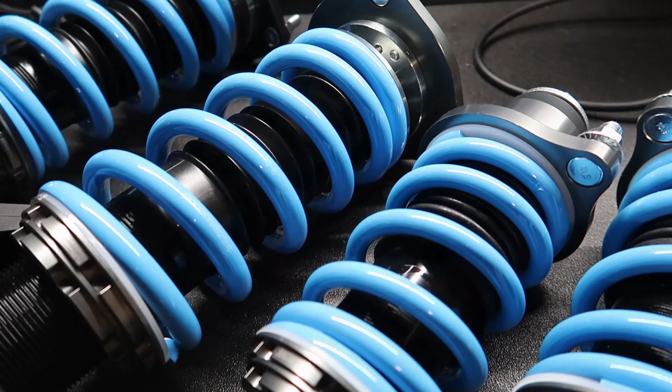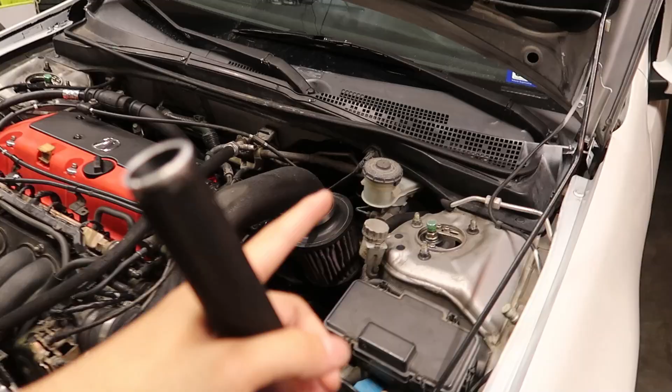Well, we got the wheels off and we're ready to install the coilovers. But I want to show you guys the Rev 9 coilovers I have installed right now. As you can see, it's leaking quite a bit of oil. The strut's blown, and the top mount makes a ton of noise. I bet it's this pivot ball in there that's gone bad. Whenever I hit a bump, it's like a really loud clunk. And now on the driver's side, when I turn the wheel, there's also another loud clunk. Not sure what that could be. Maybe it's the strut, sounds like it's coming from the bottom. So we're gonna inspect all the suspension and make sure everything's tight and see what's causing that noise.

In my opinion, I think the rear's the most annoying thing to do because you have to take out all of this interior. I remember trying to put all this back in, it was so hard because everything kept popping out and I broke a couple clips, but I fixed it. So now I'm gonna have to redo all that again. Let's go ahead and get this started.

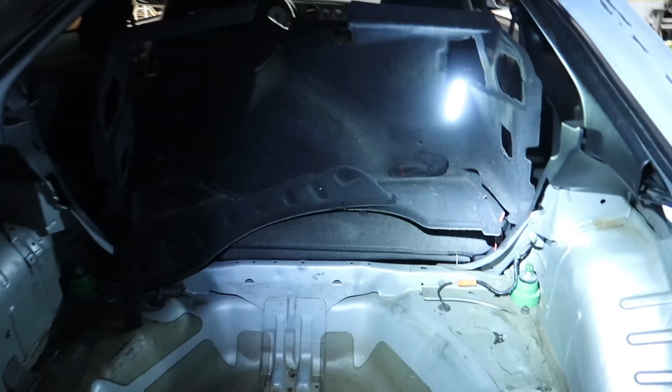Now that you got your trunk taken completely apart, you have access to the upper strut mount bolts. And here's this side, you might need a swivel to get into that. If your struts are losing tension and not staying up by itself, another thing you could do is just take some clamps and clamp it. And no matter how hard you shut it, it's not gonna close.

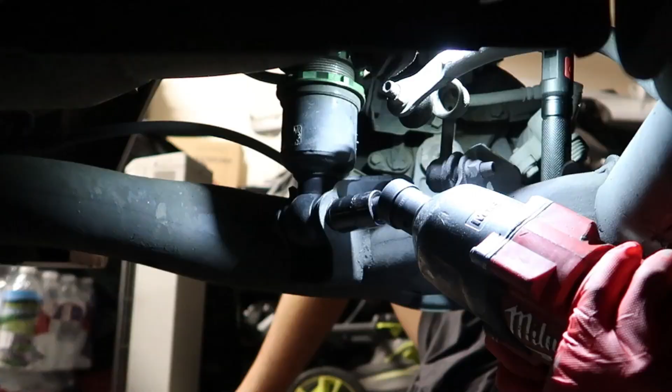Why is that on so tight? What the hell? All right, round two.

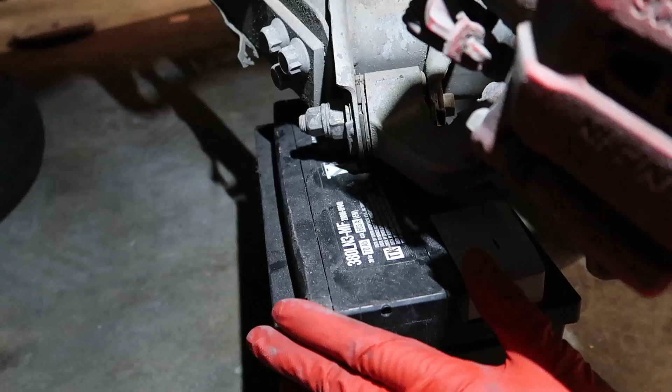It is always important to have your emergency battery to hold on to this whole assembly right here, so you're not having stress on this wire or the brake line. The way you take this out is you just do this and pull it.

Now we can take out the camber arm, but look at this, I don't think it's supposed to be moving like that.

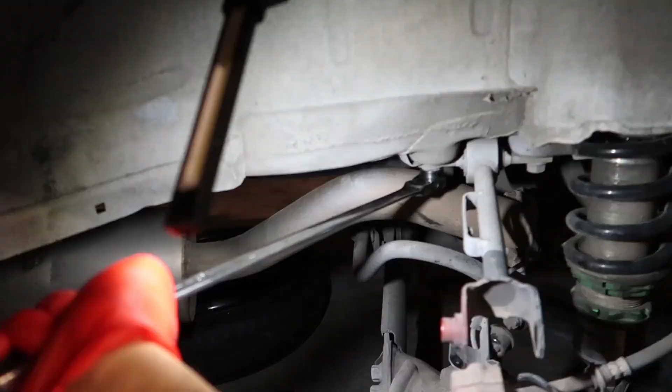Oh, I think I'm tightening that. Whoops.

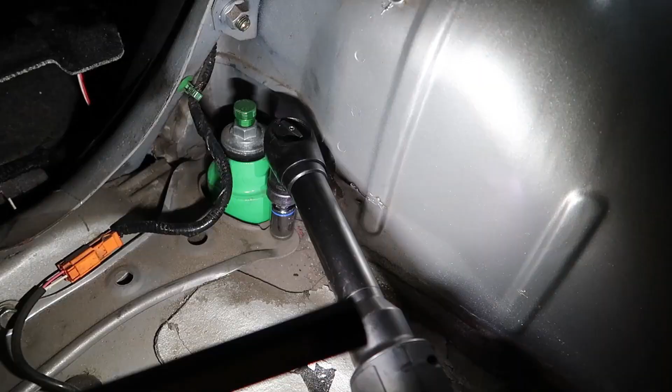You ever seen a Bluetooth sway bar link? Look at this. Bruh.

Whoa, do not do what I just did. That could have been very bad. I could have torn this line or I could have punctured this brake line. That was crazy of me.

And now we got this baby out. Let's go ahead and take off this camber arm as well.

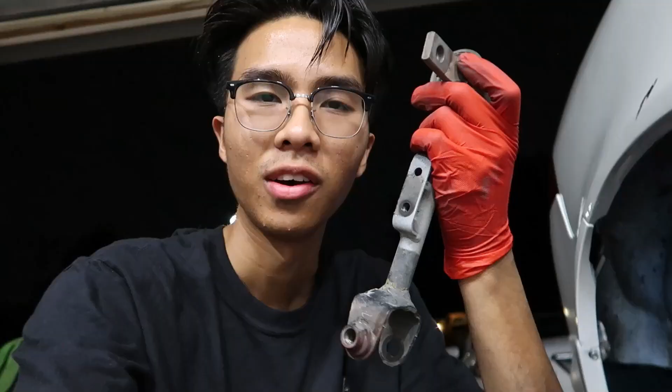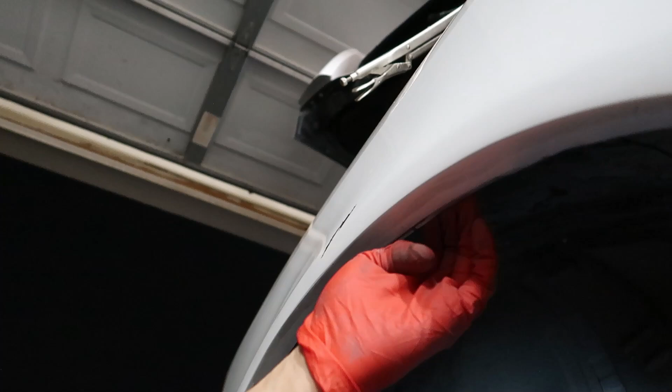Wow, I'm glad that we're replacing this. This is perfect timing, it's actually working out very well for me. I'm gonna see how to adjust the camber with this, I don't even know how to do it. We're gonna need quite a bit of camber because of this lip right here, we're gonna cut it later as well. I can feel a bunch of Bondo, so that's gonna be fun. So let's go ahead and get this on, and I'm gonna do the other side off camera.

We'll have the new Maxpeedingrods coilovers installed. Look at that, guys, barely any play in this. Oh, that seems like that's torque to spec.

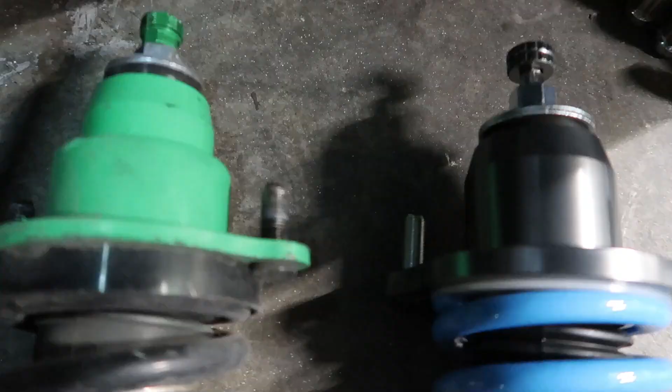So I got the coilovers side by side, and I'm trying to match the height. Do you guys see the problem here? It looks like this one can go way lower than this. I'm kind of scared because maybe when I throw this in, it's going to be hella monster truck. But we'll see whenever we get them in.

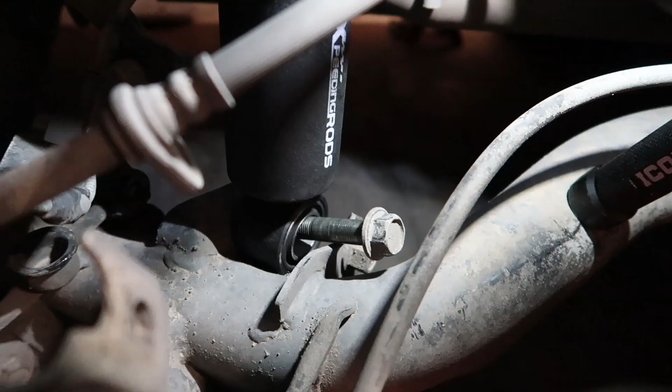You boys having a 1000 IQ moment right now. This is how I'm holding up the strut, and now I can put my bolts in. This does come with new hardware, by the way, it's pretty nice.

This shit hurts my soul, y'all.

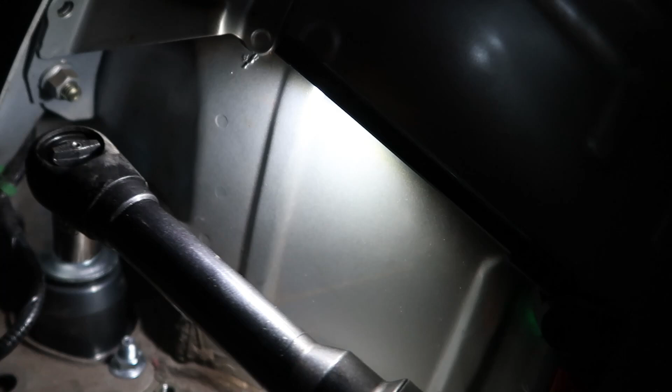The one thing I love about this electric ratchet is that it's an impact wrench as well. This thing tightens really hard. I think that's the best that we're gonna get it.

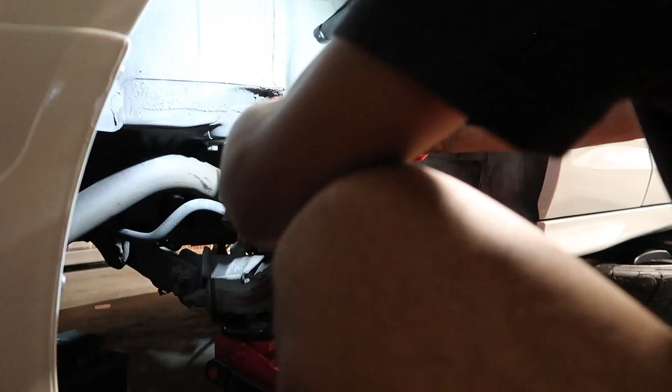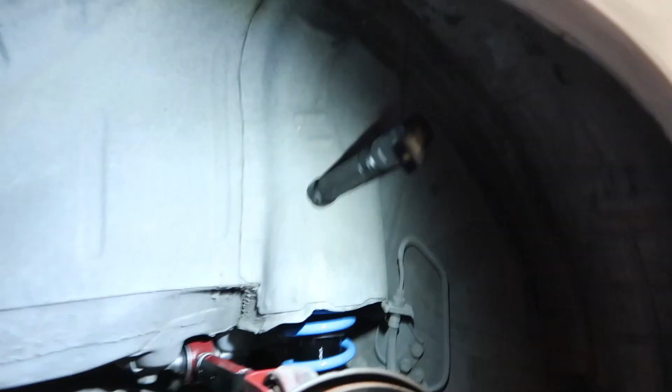So now we grab my lucky bolt, let's just force it in there. And there you have it, guys, we have the new rear camber arm installed and then our coilover.

Now let's see how high or low this thing sits. But before we do any of that, of course, we gotta swap over this side. So I'll see you guys in a little bit. That is one side down. Now we can go ahead and do the fronts and lower the car down. We'll probably lower it tomorrow though.

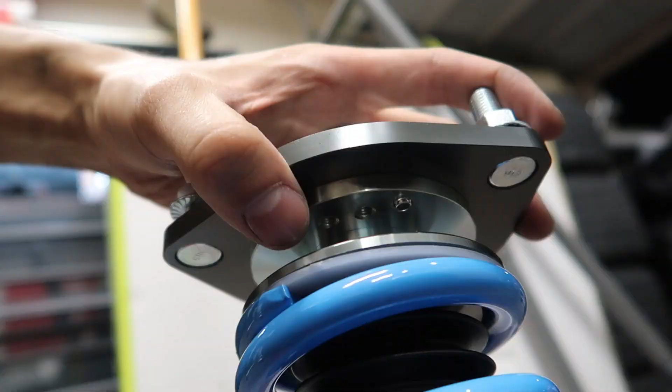One major flaw that I see with this coilover is that it does not have the adjustable camber plates. If you look underneath here, there's two drilled holes right here, and I think those two drilled holes are pretty much what these bolts would go into. It does look like we're able to take this off and put an adjustable camber plate on top, which is really cool. You know, guys, sometimes your boy just be buying random stuff, but luckily I had this on deck because it's the exact hex size for this, and we can take it off with the ratchet and not strip this out.

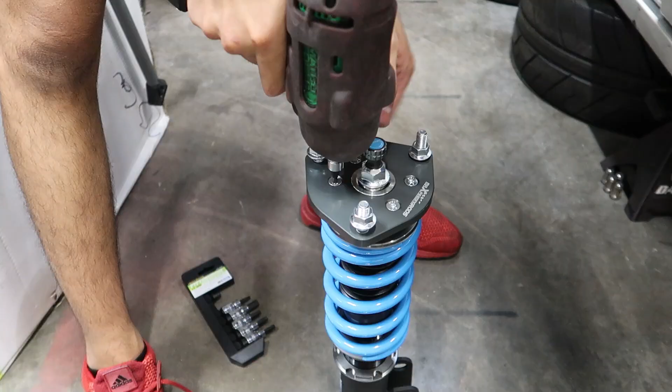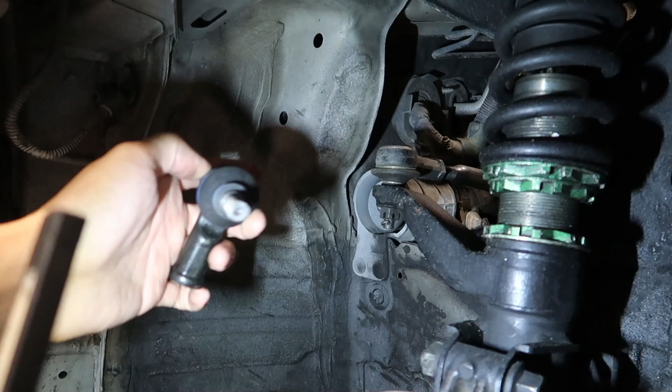I wish I would have recorded this, but I do have K-Tune inner tie rod ends that I bought for 100 bucks, shouts to my boy Derek for that deal. For the outer tie rod end, these are actually EP3, and this cost like 100 bucks too. It was expensive, but I have one RSX here, and the reason I'm running EP3 outer tie rod ends is because this coilover is actually for EP3. I thought it was for a RSX, but no, I got the right one.

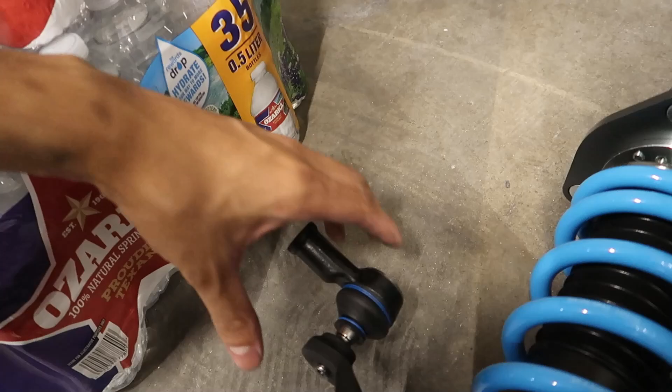This was what I got originally when I was fixing the car up, but this one fits in there perfectly, as you can see. I think it does. Shit, I might have to run the EP3 ones on this too. I'll keep you guys updated on that. This is kind of weird how it's not fitting on there correctly.

Let's go ahead and get started on installing the front coilovers.

And then you're gonna get a sensor in the back too, your speed sensor. Oh shit, I never got a 10mm there. That's crazy, you know, that's probably why my ABS light came on. Wow, okay, well I forgot to put the 10mm on there.

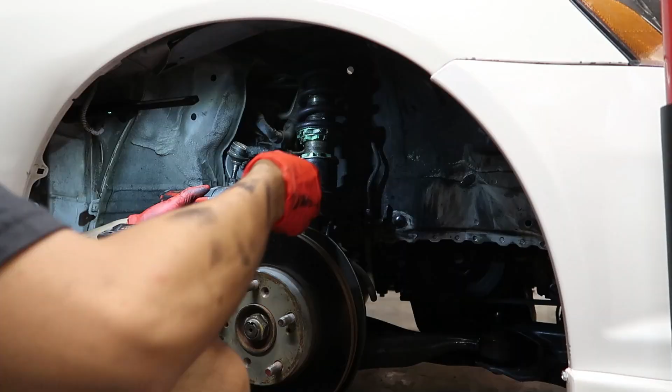It's gonna be a 17mm. Tap like that. Just needs a little persuasion. Now your tie rod is off. There we go, got the wobble on there. Should be easy just like that, guys.

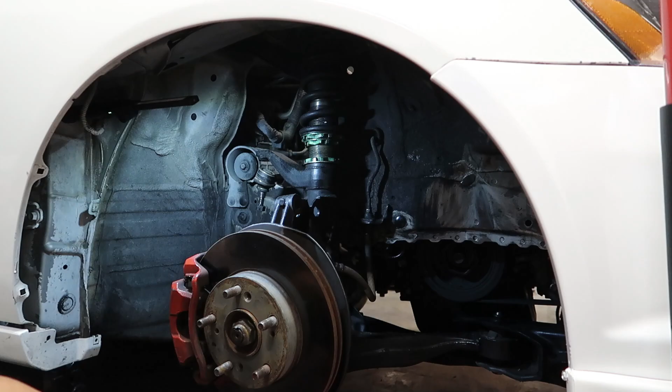Now we're gonna go on top and disconnect the strut. Some solid advice for you guys, before you take anything off, just keep a jack underneath. This thing's gonna fall forward, but as long as you got the jack, you'll be fine. This axle tends to pop out a lot, and it's pretty hard to get back in.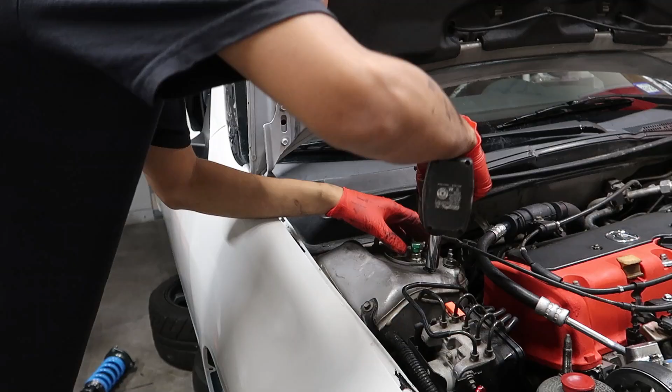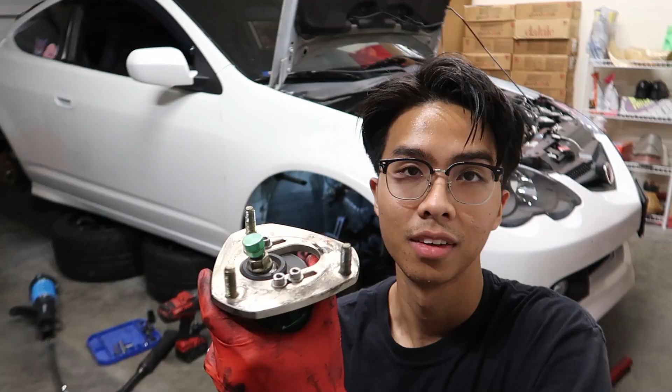All right, check this out. Do you see how this thing moves? It's not too bad, I've seen worse where you'll flop it and it'll shake, but this has quite a bit of movement to it.

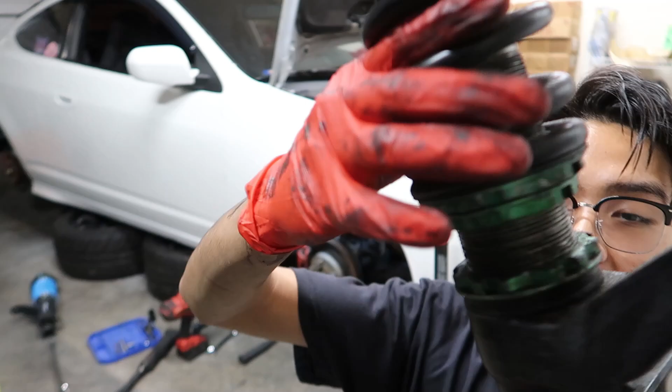And this strut was definitely leaking, you can see all the hydraulic fluid all over it, and look at my gloves. I'm gonna keep these just in case I want to throw them back on, but I don't think I'll be using these. I mean, they're blown and it's time for a new one.

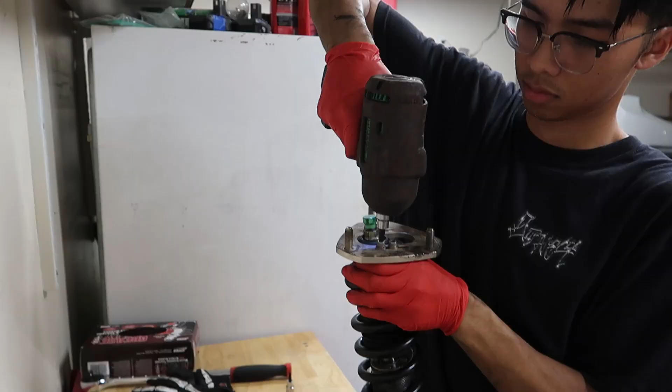Let's go ahead and transfer over this top hat. Getting this top hat off. That thing is cooked, y'all.

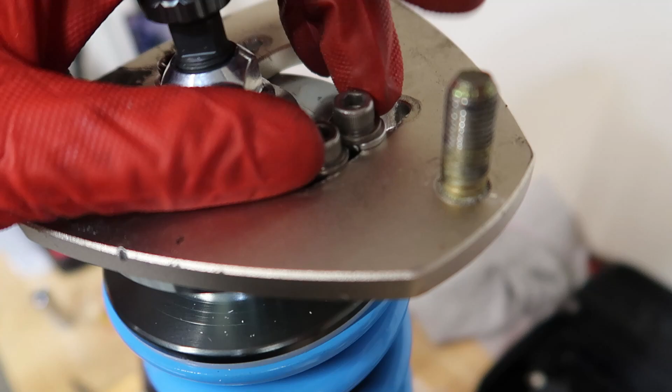Well guys, I did get the top hat on, but I did something very ghetto. I just shaved down these sides so it can fit. Obviously this top mount isn't made for this, so I'm gonna check their website and see if they do have a top mount and get that coming. It does suck that I had to do this, but we're just gonna throw it on for shits and giggles.

As y'all can see, it's the next day, nice and sunny out. Yesterday it was about 1 o'clock whenever I ended the video off, and I was so tired. I've been working all day since 7. I just ate, got some energy, did what I need to do today, and we're ready to work on this again.

Obviously this will not be enough for my wheels to fit. We're gonna need some more camber, so I picked up some camber bolts. It's my first time hearing about this, I've seen it on some cars, but I thought it was just OEM.

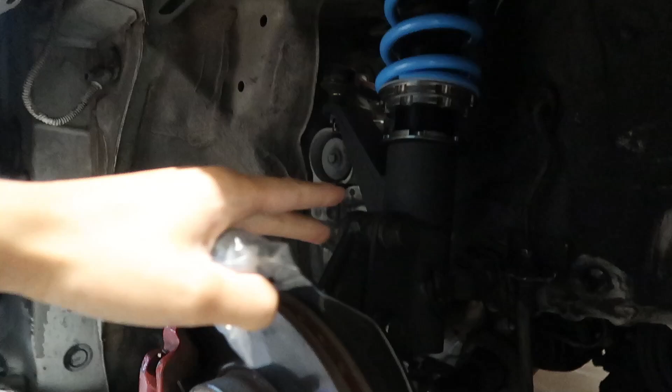So basically what you're gonna do is take this bolt and replace it with the top one right here, and it'll allow you to move the spindle back or forward. Apparently you can get up to 1.75 degrees of camber, and you're gonna need this tool right here.

I have one on the way right now. I want to make sure that the camber in the front and the rear is set, so I don't have to mess with that on the alignment machine, I just want to adjust the toe.

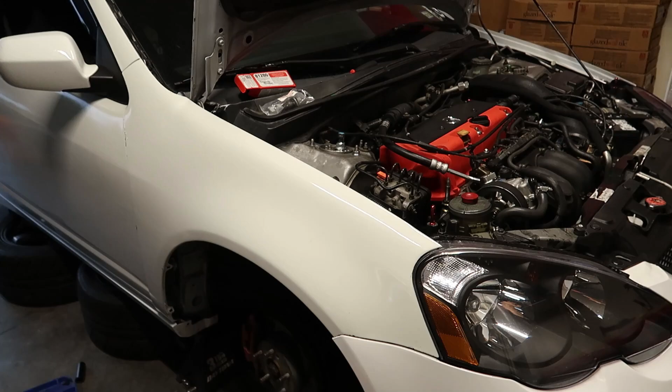But yeah, let's go ahead and get started on the other strut. This thing literally took like 3 minutes to take out, it's so simple to work on.

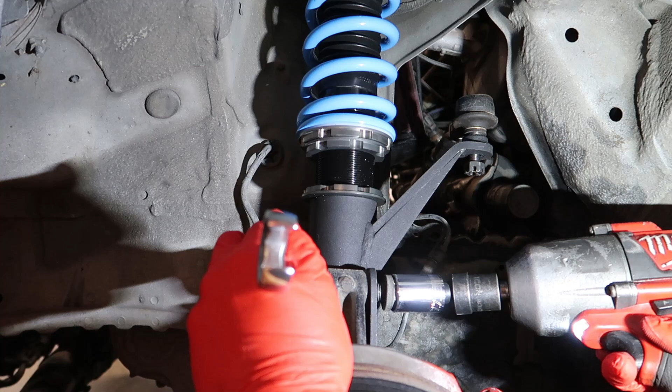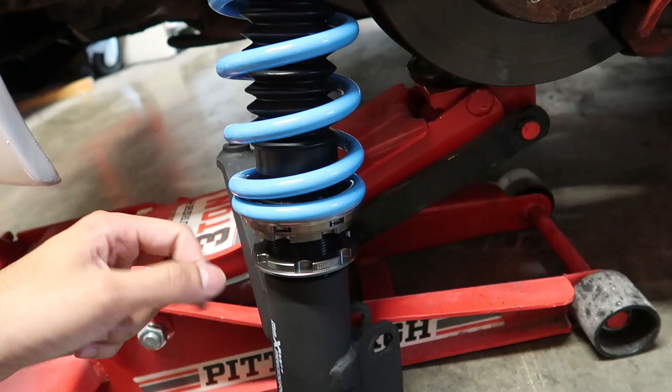Well guys, I got some unfortunate news. While I was trying to lower down this coilover, this freaking top piece just popped out. I think the preload was getting too tight. The thing that sucks about these coilovers is that the preload was already loose, so possibly this was my fault. I was just spinning it from here, and then it got so tight and everything just popped out. Heard a loud bang, but luckily this thing is fine, this pivot ball.

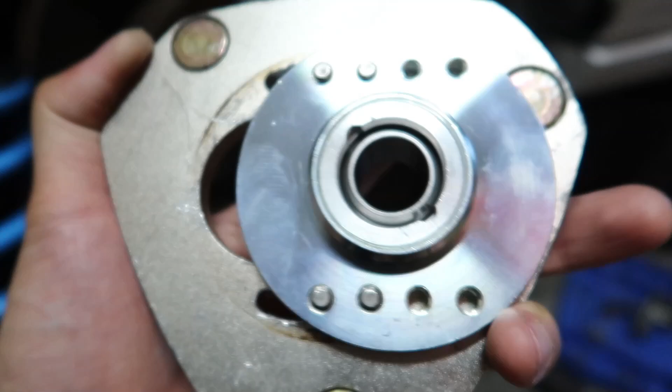So I'm gonna see how this works. I think it's just a nut, so we can just put this on the Rev 9 coilovers and upgrade the pivot ball on that.

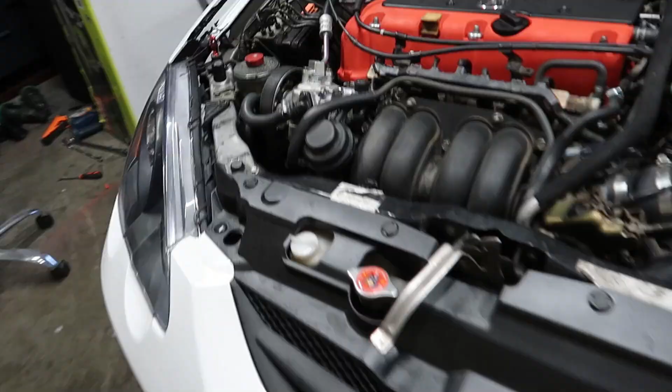We're just gonna run the Rev 9 in the front and then go Maxpeedingrods all around. Hopefully I don't die. But yeah guys, sometimes you just gotta do and not think. And I wanna get this car on the ground to see how it looks. Your boy's gonna lock in and see if I can fix this real quick. I'll get to you guys when the car is on the ground.

So I got the old coilover back in, as well as the camber bolts. Later on, I'm gonna show you guys how I installed it, but let's go ahead and see how the car looks.

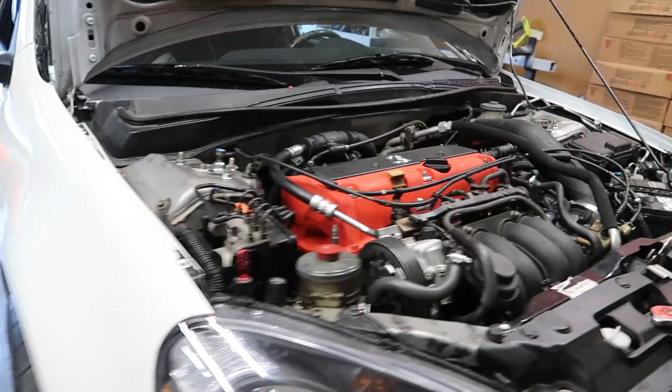For some reason, I hear a popping noise on this strut. I wonder what that is. You hear that? That doesn't even sound right.

Just the final fitment for the front. Wow, surprisingly guys, I thought the rear was gonna be very high, but this isn't that bad. I think I'll keep it like this for a bit. This one's still pretty high up. That's weird, like this one's high, and you come here, and it's like lower.

This wheel, I could tell the toe is way off. Like look at this, it's turned this way. So I'm gonna have a lot of fun driving this to the shop.

The back fits really nice. I'm actually gonna keep it like this. I was thinking about throwing on my old coilovers because I did want it a little bit lower, but for now this will do. I won't have to cut anything. And it doesn't look bad for what it is. I don't want this car to be too low.

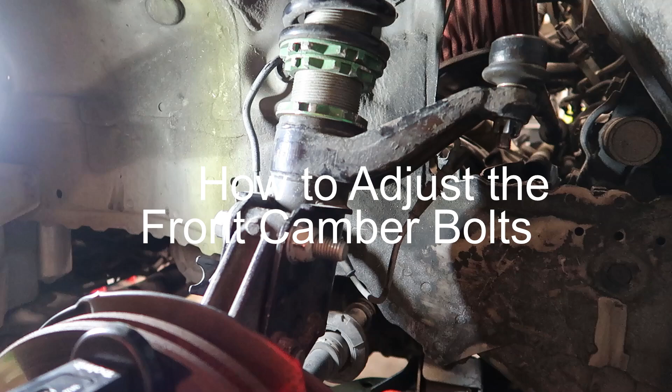So what you're gonna need is a 22 for this side and a 19. And it says not to over torque this. Unfortunately, I didn't bring my torque stick with me. I'm gonna have to guesstimate this. And what I've seen is that if I spin this, the spindle will go in or outwards. So we're gonna see if we can get this thing to...

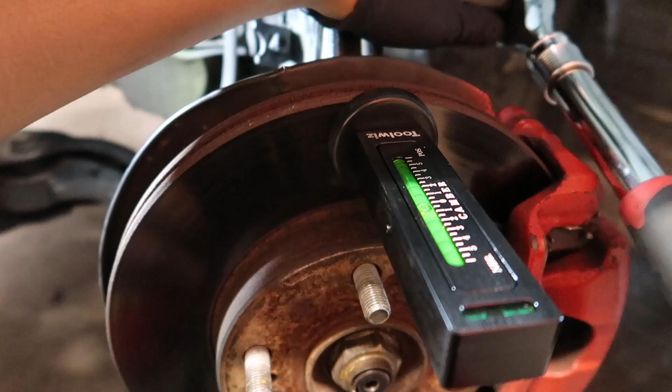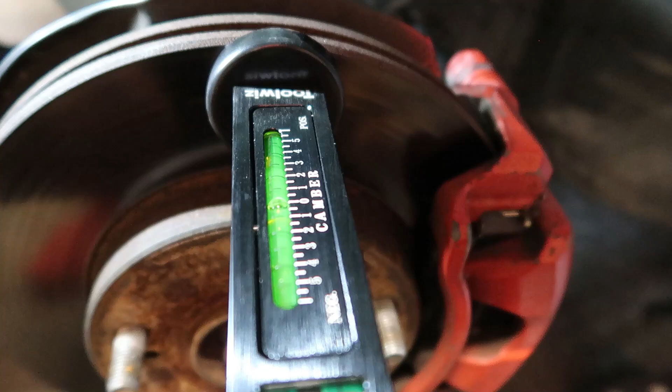2.5-ish. So I'm gonna loosen it just a little bit like that. So you see it's going upwards to positive. I need to go the other way to make it negative. Huh, so it seems like it can only go to 0.5.

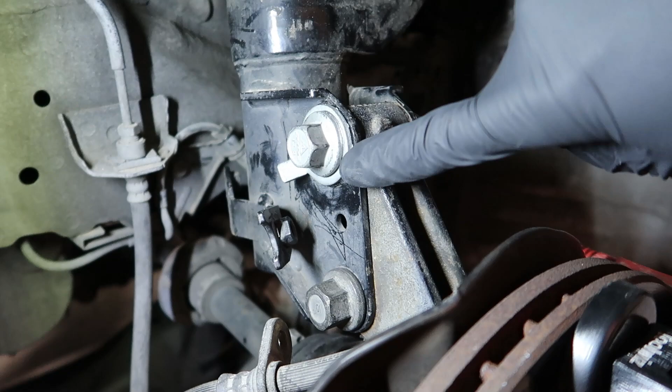But you guys kind of get the gist of it. You're just gonna have to keep adjusting this. I might take the bolt out and reposition wherever this tab goes. There's a tab right here. So maybe I'm gonna move it to the front and see if that will work. It's just gonna be a bunch of trial and error, and I'll show you guys where I'm at in a bit.

After 20 minutes of messing around, I finally got the -2 mark, which is how much we have on the other side. And basically all I did was add this washer right here that came with the kit. So now I'm gonna tighten this down. And it looks like I can go even more if I wanted to, but I want to keep it at around -2-ish. I heard it's pretty good to have a lot of camber on these cars.

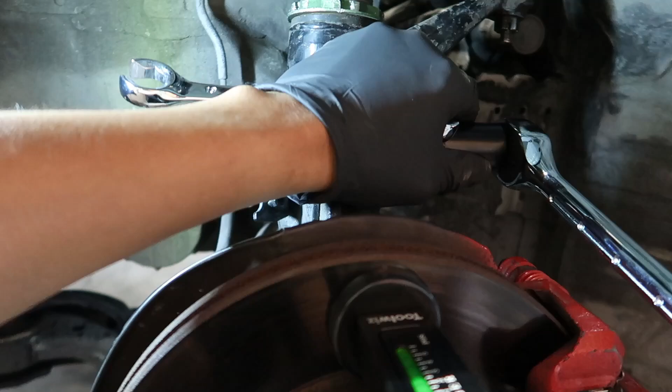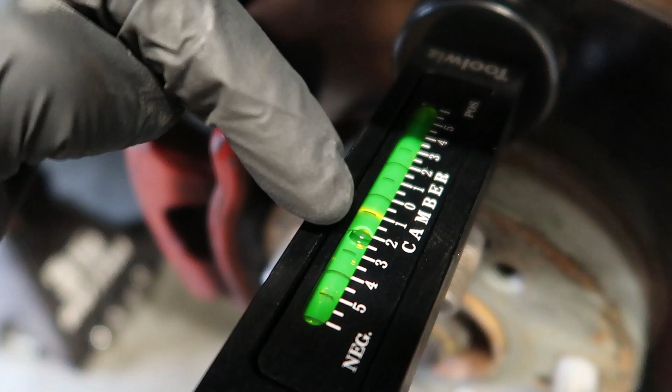So it says 126 foot-pounds. I don't know how that feels like, but I'm gonna do it like this. There we go, have about 2.5-ish of camber. This is the passenger side, and it does look about the same. It's just a tad bit more on the driver's side that we got.

Just got the car on the ground, so here's the passenger side. Looks great. And then coming to the driver's side, it's fixed, and I actually pulled out the fender with a socket. There was hella Bondo underneath here, so I'm gonna need to get a new fender. I'm gonna try and match the camber and make it look like that on the driver's side as well. Maybe it'll look lower. Yeah, I'm gonna do that off camera.

This is so boring to do. I'd rather show you guys the end result, because that's what everyone wants to see, right?

Guys, this car is looking so good. I only put -3 camber for the rear. I do like the non-camber look as well. I think too much camber is kind of ugly, so it's like a perfect amount.

Yeah, it looks so good. And I don't think it's gonna rub either. I don't need to cut any of this.

I freaking messed up cutting the other side. Now I gotta go back and seam seal this and paint over it so it doesn't rust.

Tomorrow we should get the alignment done, but I'm gonna go test drive it for a bit. Oh my god, look at my steering wheel, y'all. This is to go straight. It's so bad. I should not mess with that outer tie rod end.

The car drives really good though. It feels solid right now.

Alright, make sure you have your wheel chocks. This is important. You don't want your car falling off the lift.

Gonna put some air in the tires. I did leave it at 35, but just want to make sure none of the air is messed up because I can mess up the alignment. And then set the targets and we'll get started on the alignment.

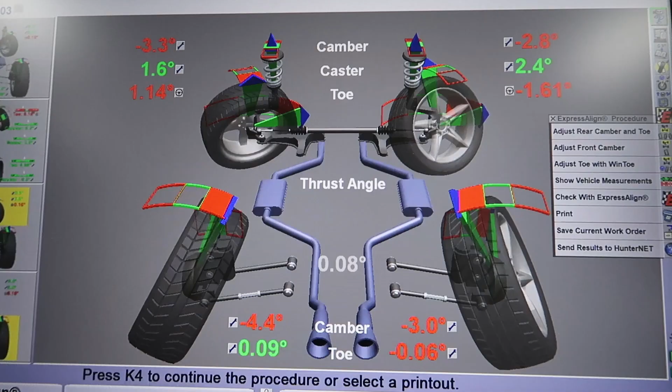Oh, here's my camber specs. I have -3 on this side and then -4. That's a lot. Remember with the tool, we saw that we had 3 and 3, and then for the fronts they're pretty even. Never mind, I take that back. We got -3 for the driver front and -2.

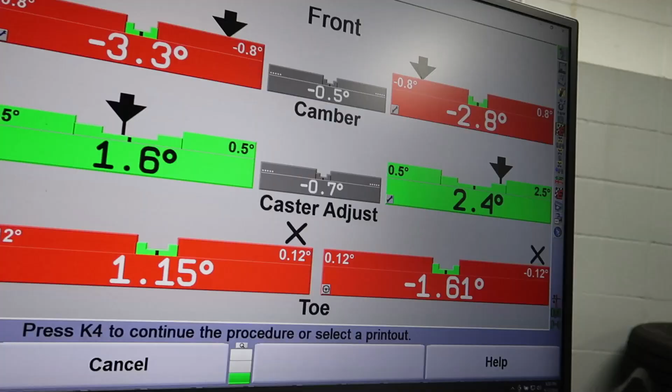So I think we're gonna fix that later, but for now we need to fix the toe. Hope I'm able to fix this, y'all. First, we're gonna start with the rear though. To adjust your rear toe, all you're gonna do is take off this 18mm nut, just to loosen it, and you're gonna take a long 24 socket and you can adjust. The same goes for the other side, it's just on the ends.

And right now, our alignment is off a lot. 0.05 on the right side, but the driver's side is not that bad. I have a shorter 24, but someone took it.

That's simple, yo. We're looking at -9 in the back, 9, 18. Oh shit.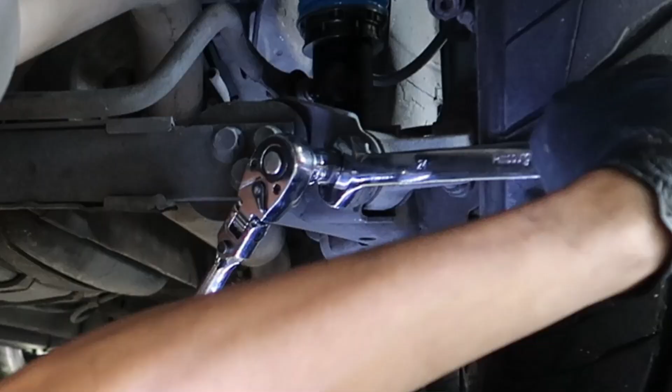I'm thinking of like Eduardo's RPF1. That should be good.

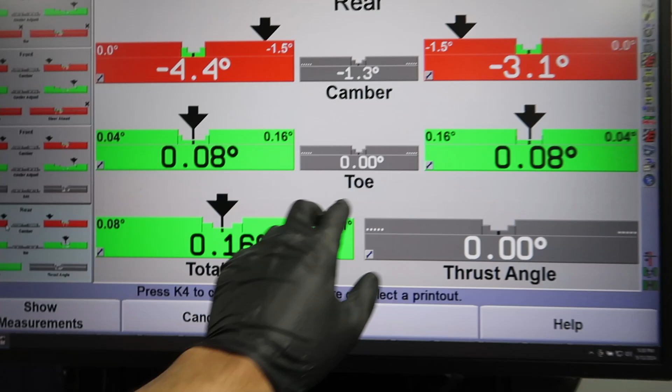So now the rear toe set, we have 8 and 8, so it's total of 16. That's beautiful. Only thing that bothers me is the camber, but luckily it's not too far off. Where we have 1 and then 4, that would be pretty bad. So they're pretty close together.

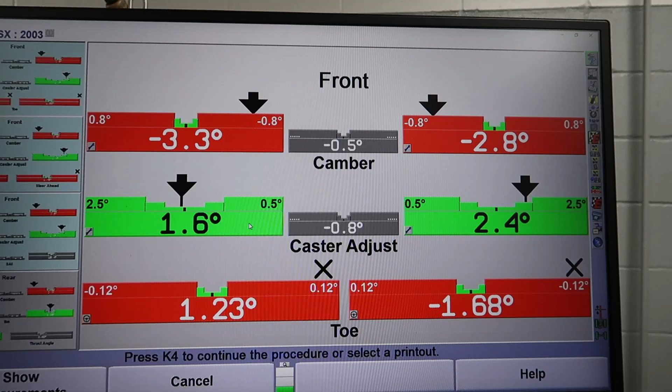But now we're gonna do the hard part, which is the front adjustment. Same thing with the camber. I was supposed to have less here with that tool, but I have more than the passenger side, which I don't really believe, because look at that. If you compare that to that, this side obviously has more camber, but it could just be because of the fender. But yeah, I'm gonna show you guys how to adjust that and then do it off camera.

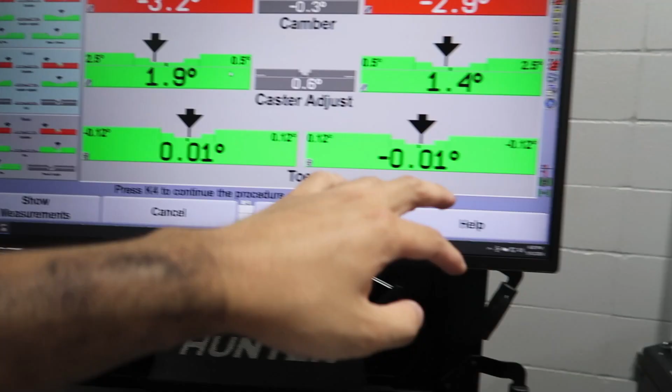Oh my god, I kid you not guys, it's probably been about 30 minutes that I've been at this. So I'm trying to figure out how to work the inner tie rod ends. I don't know how I did it, but I got this to be at 1 and 1. Before it was at -8 and like 1. Whenever I was doing this, everything was just a blur. I couldn't really focus. I just had to do and not really think too much about it.

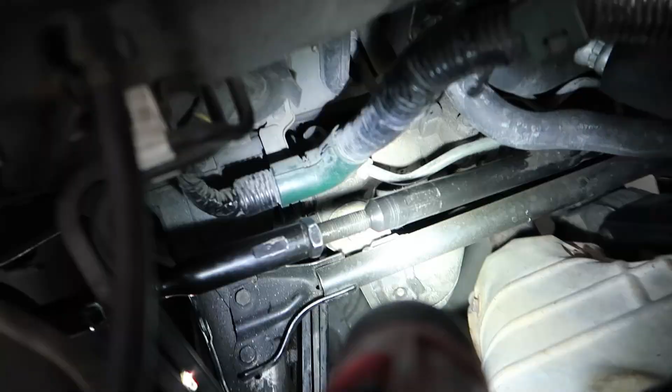Now looking at how this is set up, I think I can explain this to you guys. As you guys know, I have the K-Tuned inner tie rod ends. If you have this middle bar right here, if it's inside of here, the tire right here will go inwards and then this side will go outwards. If you move the adjustment as far out as I did, that will bring the toe inwards, so the tire will go inwards. So I figured that out, and now we have the perfect amount of adjustment.

I'm gonna definitely recalibrate this and then do the alignment again, because I did move the car. So I think we can get it perfect now.

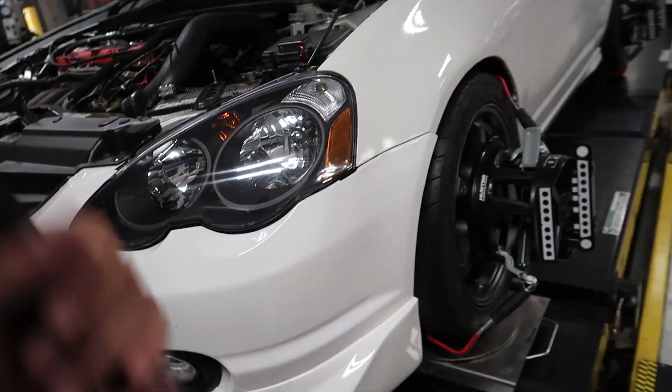And my boy Derek is running from me. You wanna say what's up to the vlog, bro? I'll be a party pooper. His car is freaking sick.

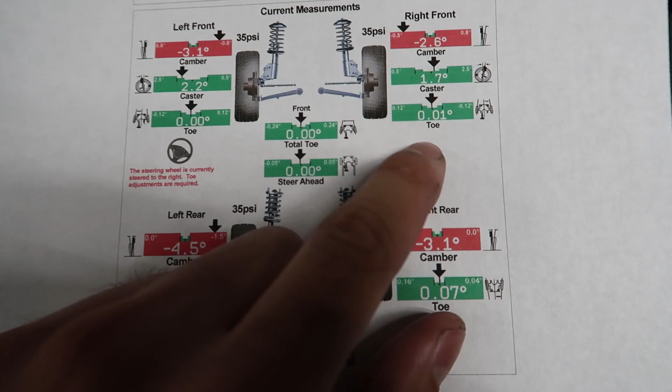Now we're gonna go test drive the car and make sure it drives straight into a telephone pole. Yeah, straight to, I don't know, to a post. Next, we're gonna do the alignment on the go-kart.

Oh my god, this car looks so good. If there's a time where I want the tie rod to pop out, I think it would be here, and not on the highway, probably going at 80 miles per hour. Oh god, like flip over 8 times. Steering wheel looks kind of straight. I feel like the car is pulling, bro. But I'm not the one driving though. It's not pulling. Oh, okay, bet.

So if you guys have inner tie rods from K-Tuned and want to get it adjusted, hit your boy up. I'm gonna charge y'all like $1 million. Yeah, $1 million, each axle. That shit was stressful, guys.

Wait, is the engine warm? Okay, do a pull, dude. Oh no.

What you think, bro? Bro, I'm like in Fast and Furious, bro. You need to play that music. Bandolero. Hey, Jesus, take the wheel. Hey, let's go.

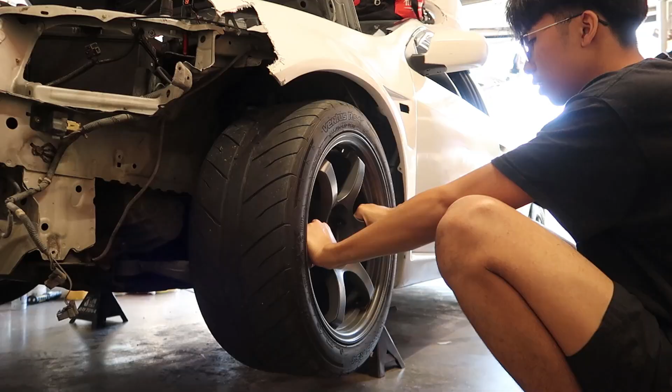Over a month, I would say the coilovers did get kind of clapped. I took it out driving and it kept bottoming out in the rear. I had it on fully stiff, but the car felt really soft. Every bump that you hit, it wouldn't take it well. I wouldn't recommend these coilovers. I appreciate Maxpeedingrods for sending it out to me, and I want to give you guys an honest review on this. I would stay away from it.

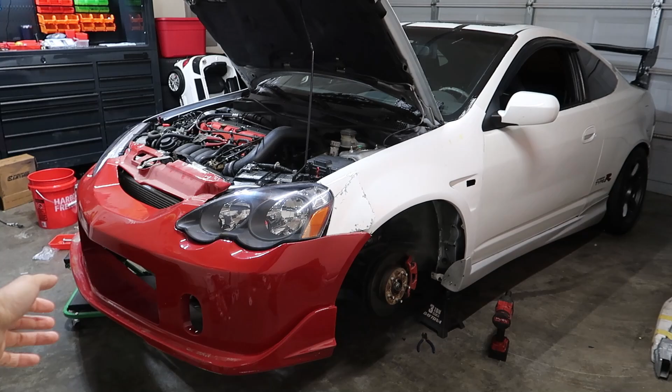So here's how the RSX is looking right now. It looks so different from before, and I love it. And I apologize for not uploading as much, but your boy's just been busy with life and stuff. But I'm trying to get back into it slowly. So hopefully this time I can commit.

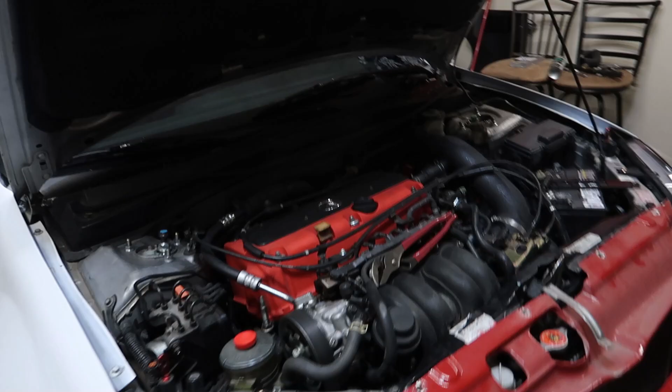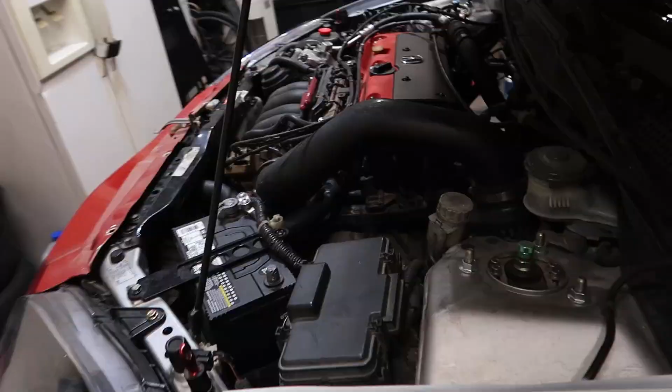Yeah, it looks so cool with the red bumper. I kind of just don't want to paint it. I had to go back to the spot where I crashed at, pick this up so it can be fixed. As far as the interior, I got a new short shifter, upgraded so many things, so this car drives amazing now. Just can't wait for the coilovers to come in so I can just get this thing back on the road. But this stuff takes a long time.

It's just a process. The Autocross event is March 16th, so I think I should be ready by then. Well, that's gonna be it for the vlog, guys. I'm just gonna end it off with the footage of my crash, and then it's gonna be to be continued.